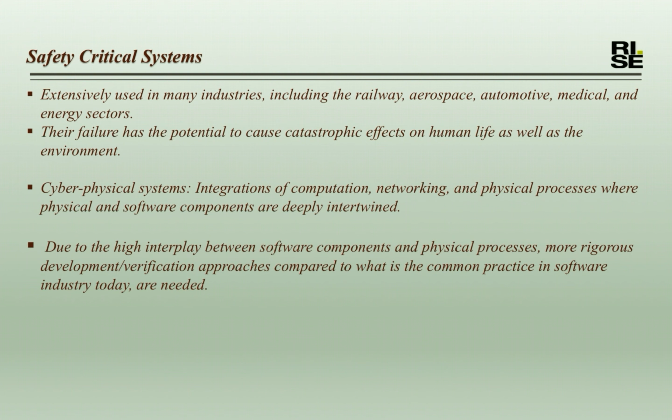For this reason, it's expected that safety-critical systems possess a high level of dependability. But what is dependability? Dependability is the capability of avoiding failures that are more frequent and severe than what is acceptable. So dependability assessment should be carried out early in the design phase to avoid unacceptable cost in terms of loss of life or environmental damage. The dependability concept is not limited, but mainly includes the concepts of safety, reliability, and maintainability.

By referring to model-based dependability analysis, we actually mean synthesizing dependability information from system models automatically. Let's see how the ideas have been going some way towards model-based dependability analysis.

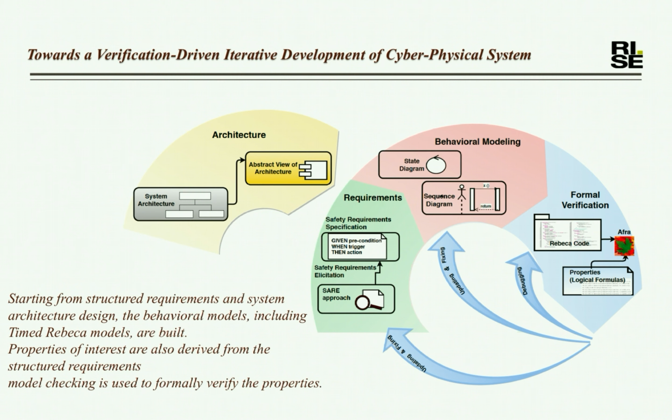In summary, the approach is an iterative development verification technique for safety-critical cyber-physical systems. The approach starts from a set of structured requirements and system architecture design, then behavioral models, including a timed Rebeca model of the behavior of the system, are built. In the next step, properties of interest are derived from the structured requirements, and finally model checking is used to formally verify the properties.

Let's explain a bit more why Rebeca has been used in this approach. For modeling the behavior of a cyber-physical system, we need a modeling framework supporting logical timeline, due to intrinsic asynchrony in distributed software systems, and also the need for alignment of the timeline in the software system and the physical part of the CPS.

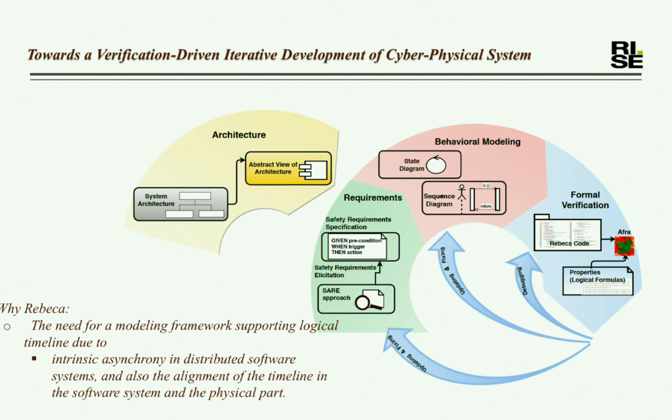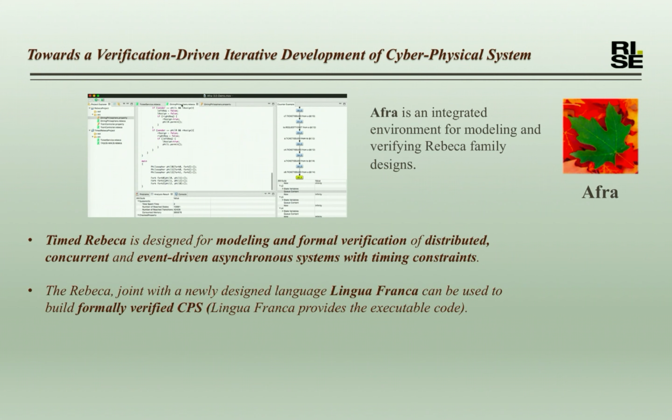Timed Rebeca is a timed version of Rebeca, which is designed for modeling and formal verification of distributed, concurrent, and event-driven asynchronous systems with timing constraints. Rebeca, together with a new language called Lingua Franca, is used to build formally verified CPS. The alignment of the logical and physical timelines is actually handled by Lingua Franca. It's also worth mentioning that AFRA is an integrated environment for modeling and verifying Rebeca family designs, and has been used in our approach for modeling and verifying our Rebeca code or model.

The proposed approach carries all the benefits of a model-driven development approach. Meanwhile, safety verification in the approach helps in finding concurrency bugs and timing issues. Let's have a bit more detailed view of the approach.

The approach starts from a small set of safety requirements elicited by the SARE approach and presented in given, when, then syntax. Based on the safety requirements and the architecture document, we create the behavioral models such as state diagrams and/or sequence diagrams.

Then we build a formally verifiable textual model, which we refer to as Rebeca code. After that, we use model checking to find problems in the Rebeca code, and based on the results, we cycle back to correct the code, or cycle further back to refine the requirements. This process continues until having a solid verified code which is consistent with the requirements.

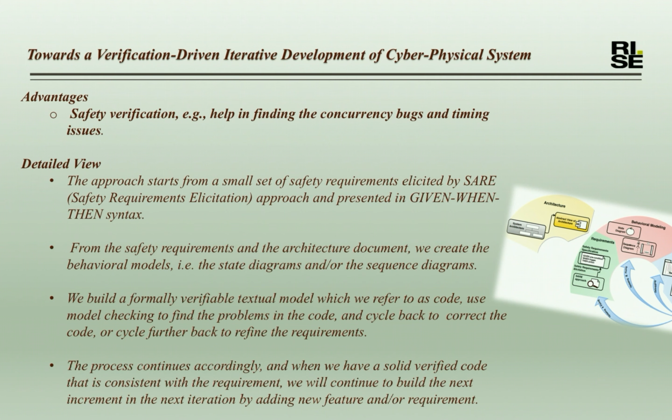We will continue to build the next increments in the next iteration, by adding new features or new requirements.

Let's show the applicability of the approach on a door controller case study from Bombardier Transportation. As we said, the approach starts with a set of requirements plus a typical system architecture like a component diagram of the system. As you see in this figure, there is a small set of requirements elicited by the SARE approach, based on considering a particular hazard in the system. The hazard shows that the passenger may fall out of the train.

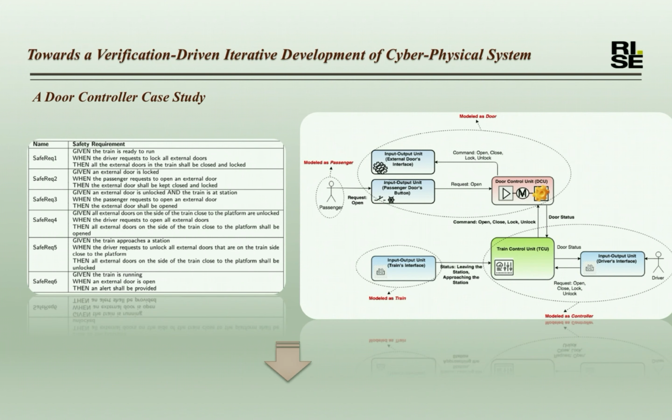After considering the set of requirements plus the typical system architecture, in the next stage we developed the behavioral models of the system. Rebeca is an actor-based modeling language, so we need to extract actors from the behavioral models and the component diagram. The actors are mainly extracted or identified from the component diagram, and then we use the behavioral models to show the interactions between the actors.

Then a timed Rebeca code is developed, and after that the requirements are used to extract some assertions, and the properties are verified based on checking the assertions with the model checker included in AFRA. So far we have developed a small Rebeca code which is consistent with the extracted assertions.

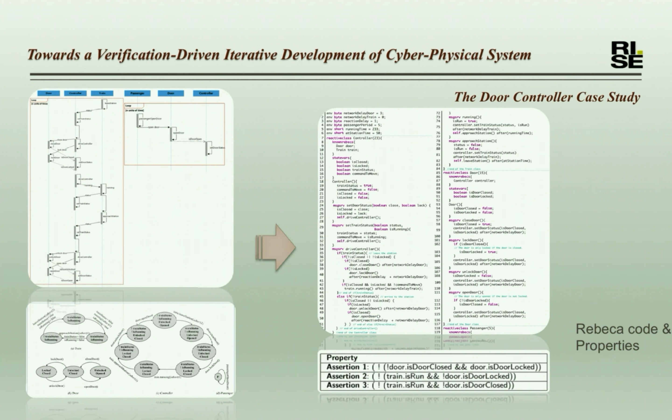We add the concept of platform, which has already been defined in the set of requirements. A platform is an area alongside the railway track providing convenient access to the train. So the concept of platform is added to the code, and subsequently a set of relevant assertions are extracted from the requirements. Then model checking and the resulting counterexamples lead to some updates on the code, and this iterative process finally results in an updated code which includes the concept of platform and is also consistent with the set of requirements.

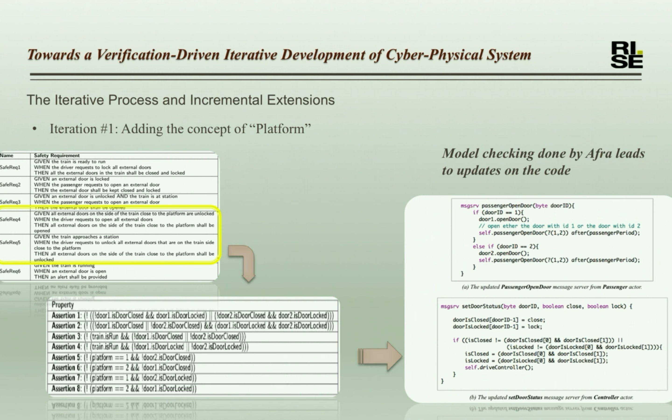In the second iteration, we want to check the concurrency and timing issues. In this iteration, I'm generally verifying the consequences of the interference between two events: an open command triggered by the passenger and a lock command triggered by the controller after the doors of the train are closed and the train is ready to leave.

Actually, the model checking finds a live-lock bug. This bug happens when the train wants to leave the station and a passenger wants to open the door by pressing the open button every 5 units of time. Then the train never reaches the running state. So the model checking done in this iteration shows that a new requirement is required to be added to the set of requirements to avoid these situations.

And so consequently, for example, requirement number 7 is added to the set of requirements.

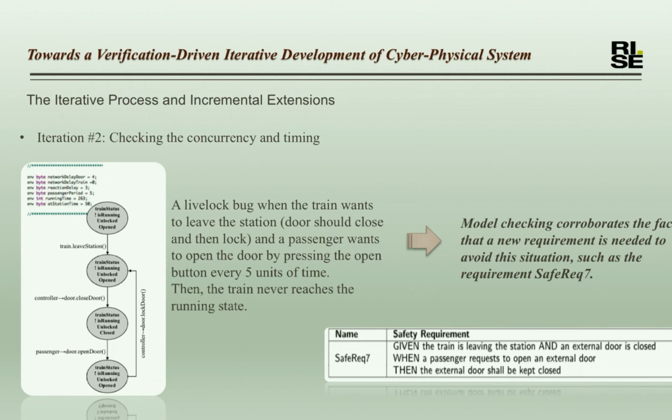The proposed approach is a lightweight, verification-driven, iterative process for model-driven development of safety-critical cyber-physical systems. It uses actor-based modeling and formal verification using timed Rebeca and the associated model checking tool called AFRA. Actor-based style of modeling mitigates the issue of transformation from high-level specification to the inputs of a formal verification tool.

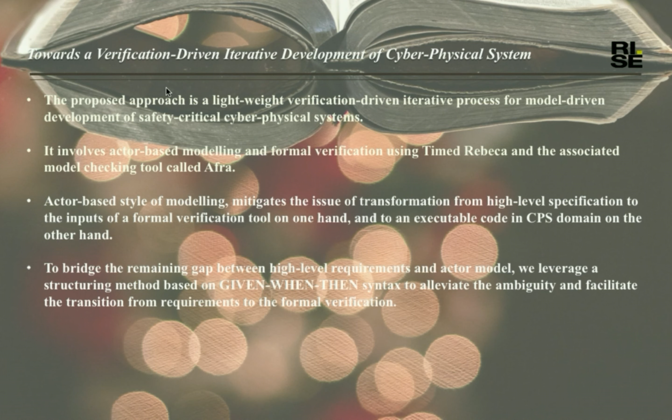Moreover, in order to bridge the remaining gap between high-level requirements and the actor model, we also leverage the structuring method based on given-when-then syntax to facilitate the transition from requirements to formal verification.

Another aspect of model-based dependability analysis is fault and failure analysis. Fault tree analysis, called FTA, and failure modes and effects analysis, called FMEA, are two well-established techniques in dependability analysis. In this section, we are exploring some proper tools for automating FTA and FMEA processes in Bombardier. In this field, HiP-HOPS is an open source, well-suited tool for automating FTA and FMEA.

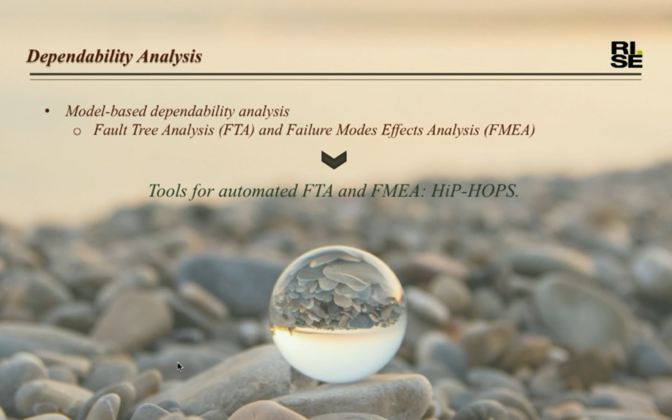In the next slides, we will explain some of the main features of HiP-HOPS, which are quite helpful for automating these processes in Bombardier. FTA and FMEA are classical system analysis techniques widely used in reliability engineering. In Bombardier, these techniques are used for computing demand response time, called DRT, and failure detection reaction time, called FDRT.

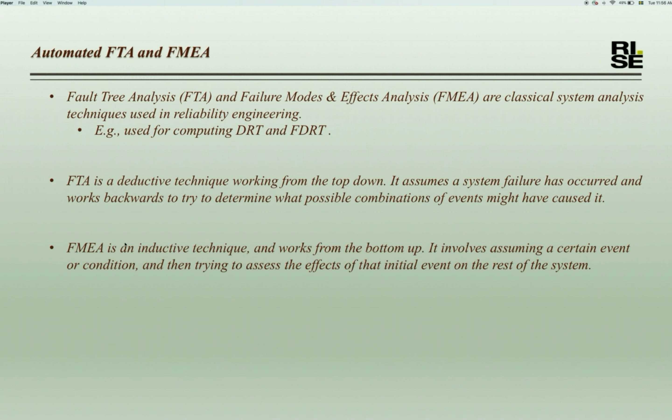FTA is a deductive technique working from the top down. It assumes a system failure has occurred and then works backward to try to determine what possible combinations of events might have caused that failure. In contrast, FMEA is an inductive technique and works from the bottom up. It involves assuming a certain event or condition and then trying to assess the effects of that initial event on the rest of the system.

The fault tree synthesis in HiP-HOPS consists of three main phases. The first phase is annotating the system model with the failure data. The second one is synthesizing the fault tree, and the last one is FMEA synthesis. Let's see how these phases are done in HiP-HOPS.

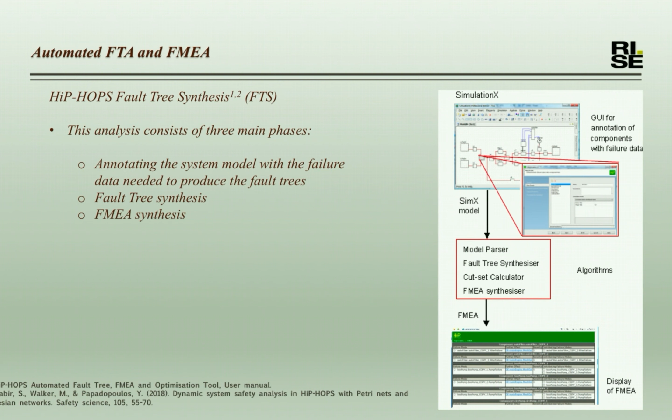Before going into the detail of phases, it's worth mentioning that HiP-HOPS can work with MATLAB to analyze annotated Simulink files. It can parse those models and synthesize fault trees. It generates minimal cut sets, and it's also able to generate FMEA and produce fault trees. HiP-HOPS can also perform multi-objective optimization on the models to produce a set of solutions to choose alternative components and best sites for redundancy allocation.

It's also important to know that FTA and FMEA analysis are mainly done manually, and the process of performing these analyses can be laborious, particularly for large and complex systems. So in order to incorporate those analyses into the design phase, it's important to automate them so that they can be carried out more quickly and efficiently.

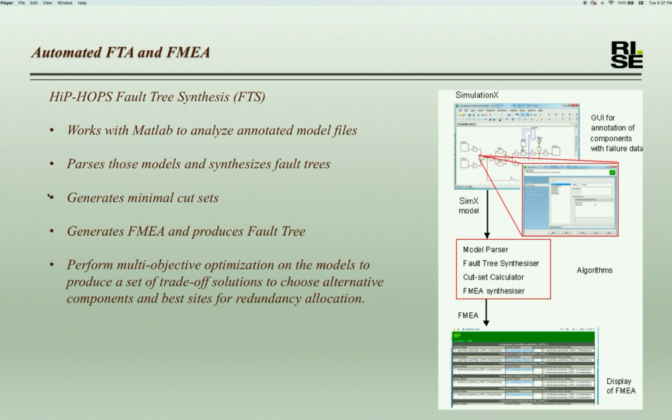The first phase of fault tree synthesis is the annotation phase. The basic topology information of the system is provided by the model, and then the model is required to be annotated. Annotation data is failure expression showing how deviations in the component outputs can be caused either by internal failures of that component or corresponding deviations in the inputs of that component.

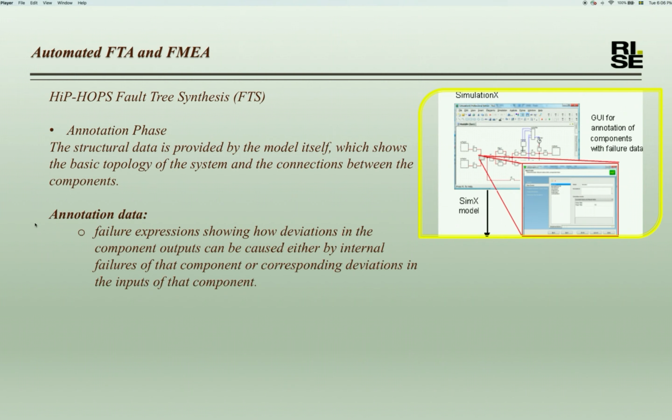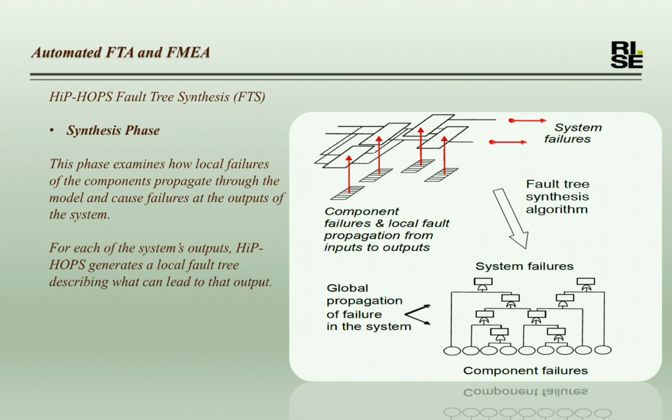Then the second phase is the synthesis phase. In this phase, the tool examines how local failures of the components propagate through the model and cause failures at the outputs of the system. For each of the system's outputs, HiP-HOPS generates a local fault tree describing what can lead to that output. Then it combines the local fault trees into a single fault tree for each possible failure of the system output, showing how malfunctions of that output are caused by combinations of other malfunctions or failures of other components in the system.

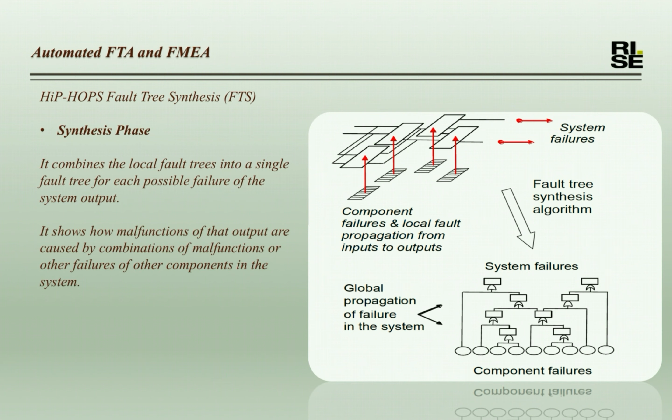The next phase is the analysis phase. The produced fault trees represent the propagation of the failure logic through the system, but they can be large and complex in many cases. So in the analysis phase, the tool is able to reduce the fault trees to their minimal cut sets. This means it retains the relationship between the basic event and the top-level system event, and removes the intermediate propagation path. In general, two types of analysis, deduction of causes and induction of effects, are done in the analysis phase.

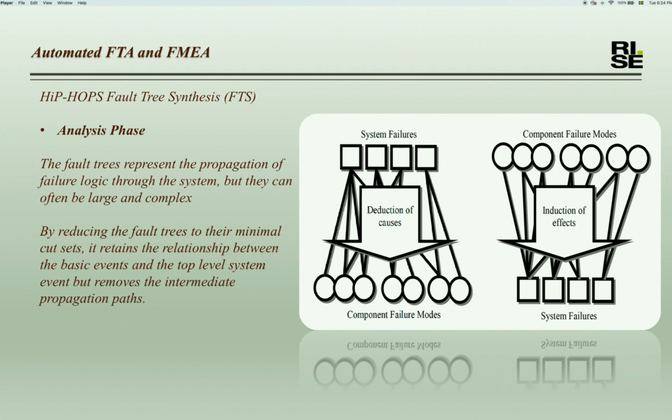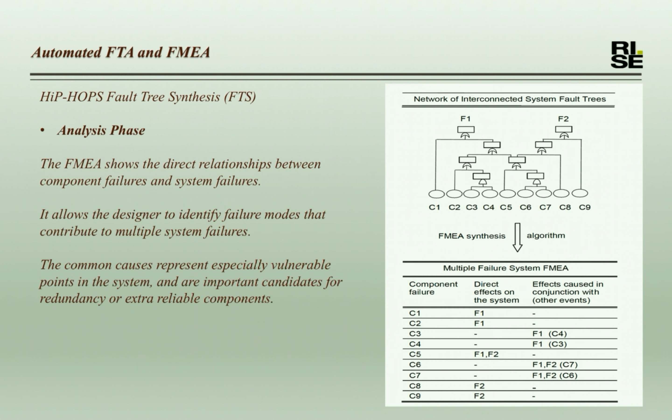In the analysis phase, we can say that the FMEA shows the direct relationships between component failures and system failures. It allows the designer to identify failure modes that contribute to multiple system failures. Those common causes can represent especially vulnerable points in the system, and they can be very good candidates for redundancy or extra reliable components.

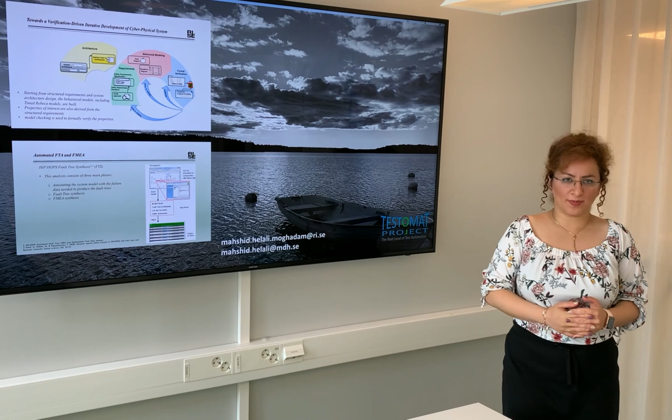So in this video, we presented a summary of two approaches that were proposed and studied in the Testomat project for improving model-based safety analysis in Bombardier.